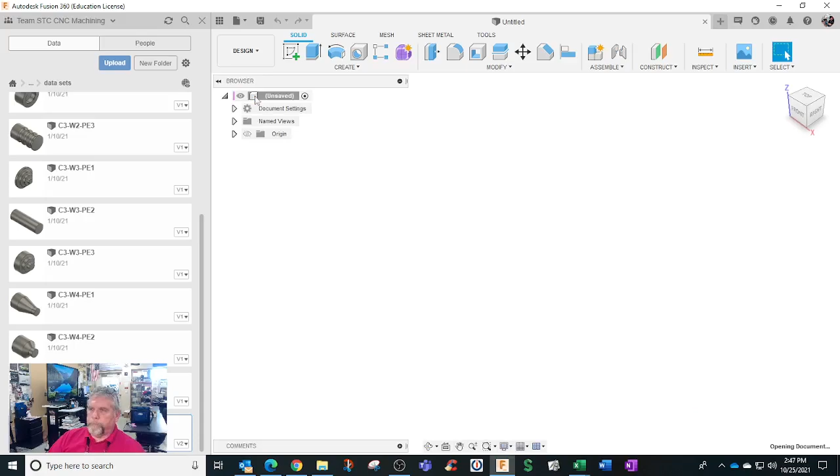Alright, probably the first thing we want to do is at least have the basic Titans of CNC library. Under Student Assets Uploads, we go to CAM Tools and get the rocket lathe tools. Alright, and you go into the assets and copy. When you open the file up, just copy and save it in your directory. So this is out of the lathe course. And warnings, okay.

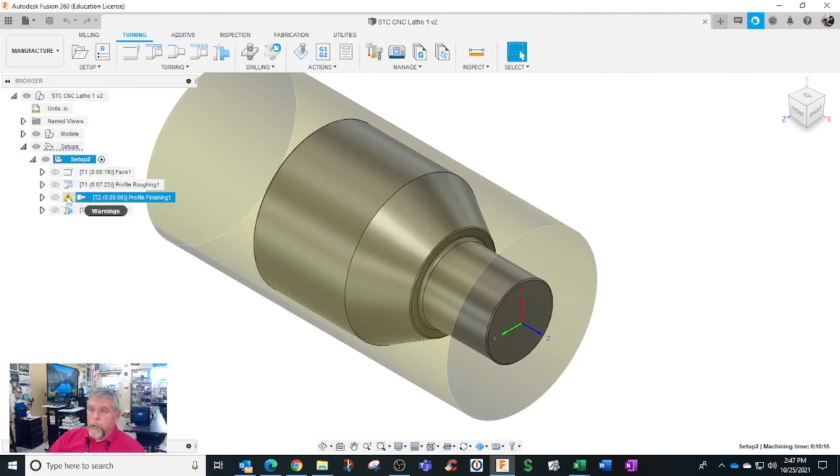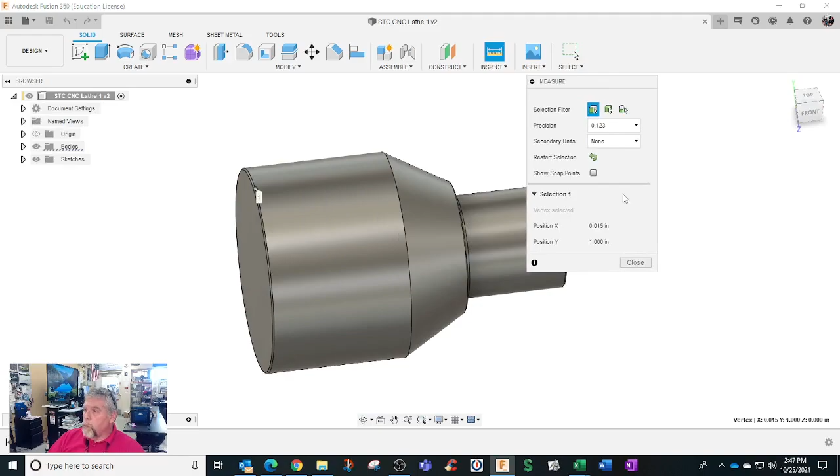I guess I'll just go over this now. It looks like I started to program it. So we're not designing. This is the design side. Pretty simple part. I'll do a quick inspect on size, like the big diameter. Says 1. Oh, I can't really tell what that says. Inspect that ring. I for inspect. 2-inch diameter. Okay, gives me a good idea.

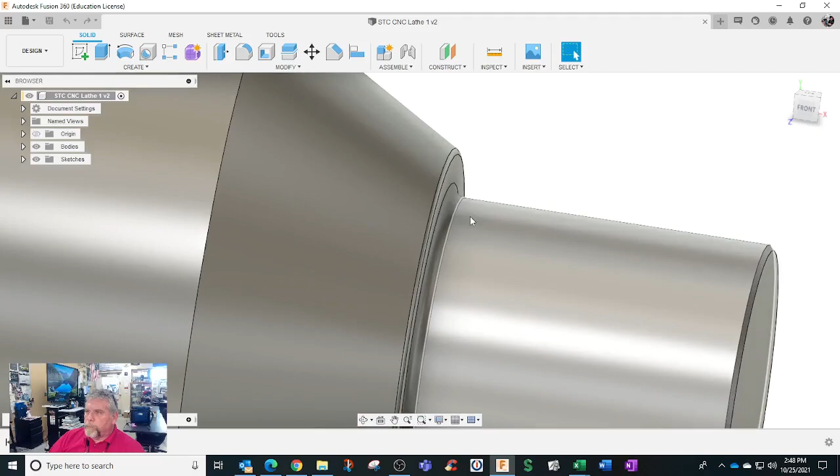So in our CNC lathe, we would have to call this a chucking part. We can't run bar stock. We'd have to cut off material, and we've got to cut off extra to hold in the chuck. So as far as your setup goes, if we look at this, it's a pretty simple part. I can even turn the sketches off.

It's got a little chamfer, radius, I can't tell. Inside here is always going to be radius. That's how hopefully lathe guys design it, unless they're putting threads there. It's a pretty simple part. So I would treat this as rough, finish, cut off. 3 tools only needed for this.

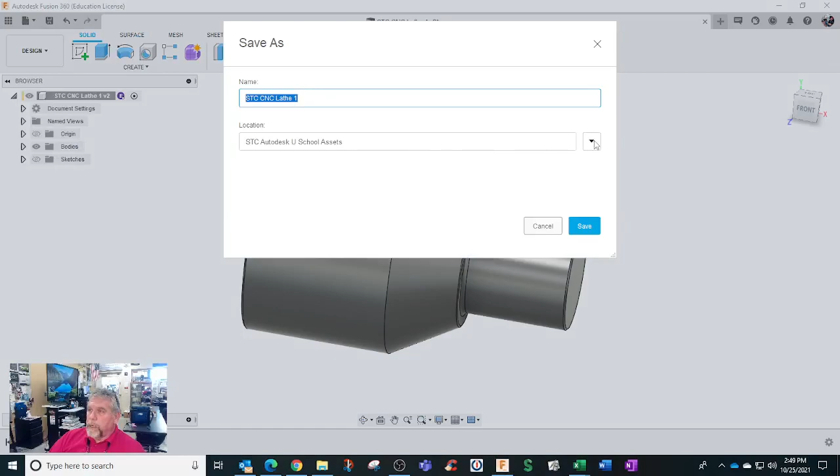So I'm going to just save this as a copy. Save as, I can't save it in the assets. I'm going to save it in Pokey's directory. Oh no, I'm still in the assets. Tech, Pokey, new folder, lathe. Must have my caps lock on. Alright. Save. Okay.

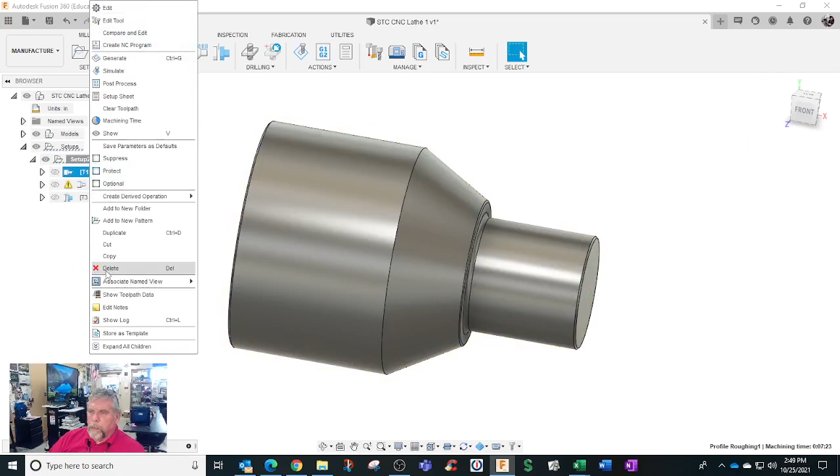Let's see, manufacture. Right. I'm going to delete all these things. Delete. Delete. Delete. We have no setup, right? So up here we've got milling, turning, additive, inspection, fabrication. That'd be sheet metal.

So we're in turning. But if you happen to be here by accident, you hit new setup, and you end up with that, it's probably still in milling. So you can switch that on the fly. Turning or mill turn. Round part. So it always gives you a suggested size. And we have 2 setups there. Let me cancel. I'm going to delete.

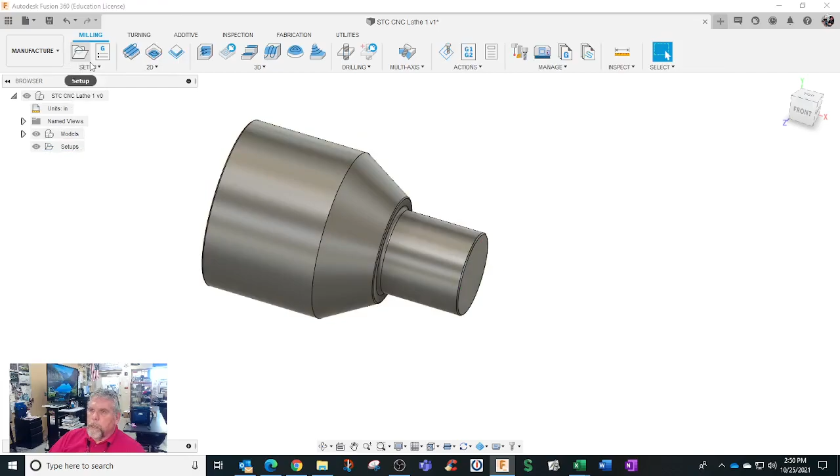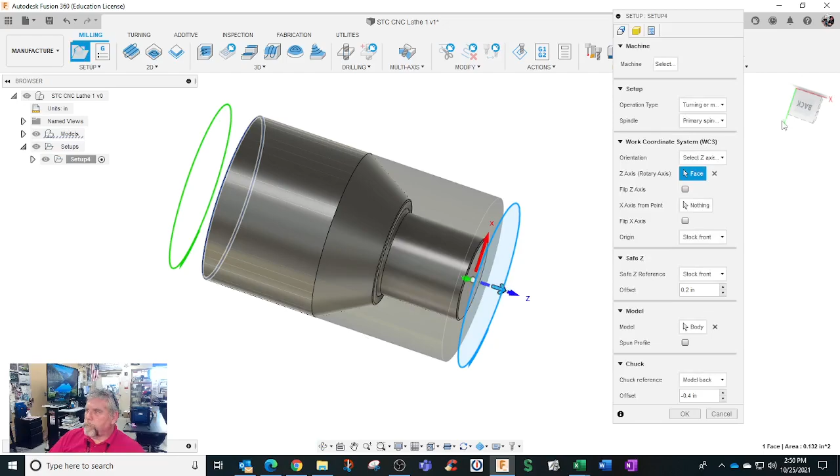Alright, setup, new setup, turning, right? Z, or the orientation, this would be Z facing the front of the machine, and X would be actually facing up. So that's probably going to be our orientation, like that. Even though it doesn't quite line up with that. If I really want to, yeah, that would be good right there. X up, Z front. And I want it to align to the view cube.

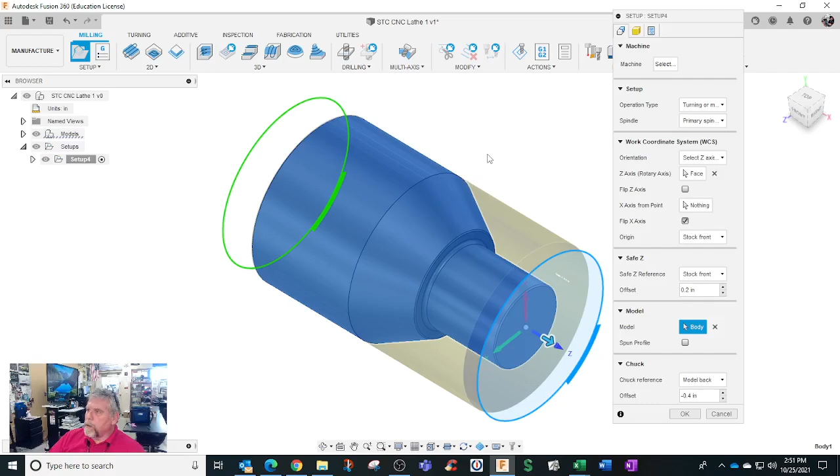So it's identified the body, right? And it gives you some suggestions here. The material size. Let's look at that. So it says fixed size cylinder. I'm going to go to the next increment up, like 2.25. All right. I like that material on the front. So I'm going to do offset from front and put an offset of like 0.025. Extra on the front, and I need some on the back.

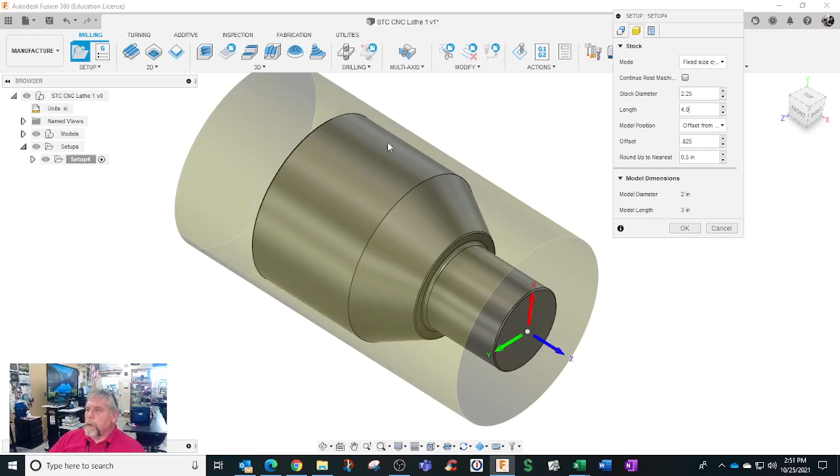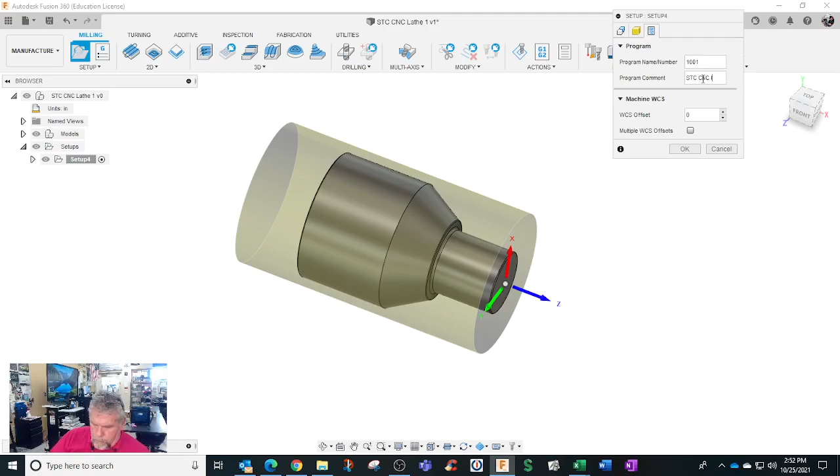Let's see. Make it 4. And I'll have to estimate how much I'm going to clamp by. I'll just leave it at that for now. And I'll get the setup tab done. So I'll call this STC CNC. Oops. Oh, the caps lock was on. Right. Okay. Alright, so we got a basic setup done.

So we're working out of the tool library, the cloud library, STC Rocket Lathe tools, right? So in here, these are turning tools. It says turning general, right? Boring bar, turning grooving, and threading. So pretty basic. I'll shut all those off.

All right, so up here we have facing, roughing, finishing, and grooving, and then parting. And then we have drill cycles. And so on the lathe, it's going to be drill on center. Pretty basic. Also, some of the tutorials, the roughing and finishing were on the same tab. So you're going to have to read between the lines if it's like that.

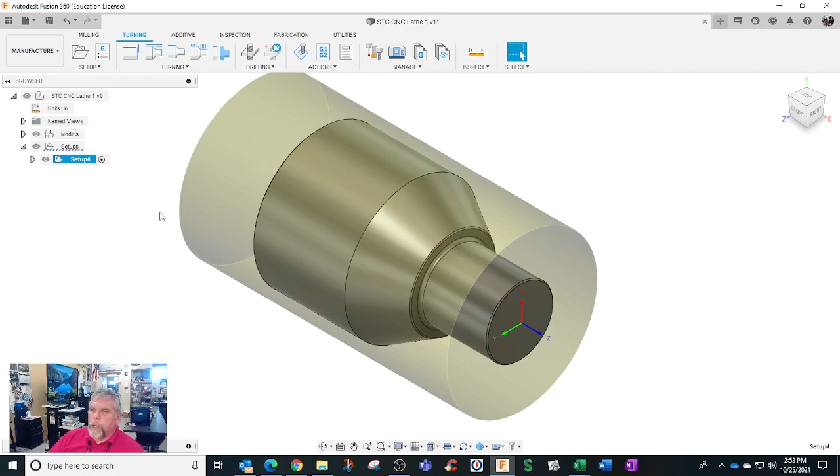I always want to do facing first. So I'm going to go facing, and I got to go get a tool. I'll go to the Rocket library and see what I got there. And I'm going to do turning general, and I'll go with the bigger one, tool 2. I'll go aluminum rough for feed and speed. So these machines run in feet per minute. So I'll just go through. These are presets. I got flood coolant.

Use constant surface speed. That's going to run the G96 code. Even says right there in the highlight. And it's also known as CSS, constant surface speed. And it's going to run in surface feet per minute. So your feet per minute, that's all you need to run these things. And you want to put in maximum spindle speed. This is also known as a G50 command.

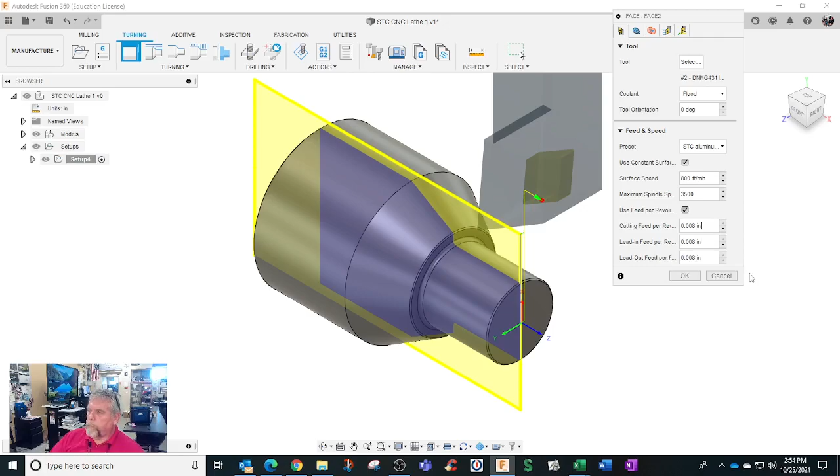So this is going to be a lathe chuck job. I'm going to make that 3500 max. And we're going to use feed per revolution. So you want to have both of these checked. And here's some suggestions. 0.008 cutting feed per revolution. So the lathe runs per revolution, which is like the chip load calculation. And you only have one tooth, so it's all you really need. Making these all the same would be fine.

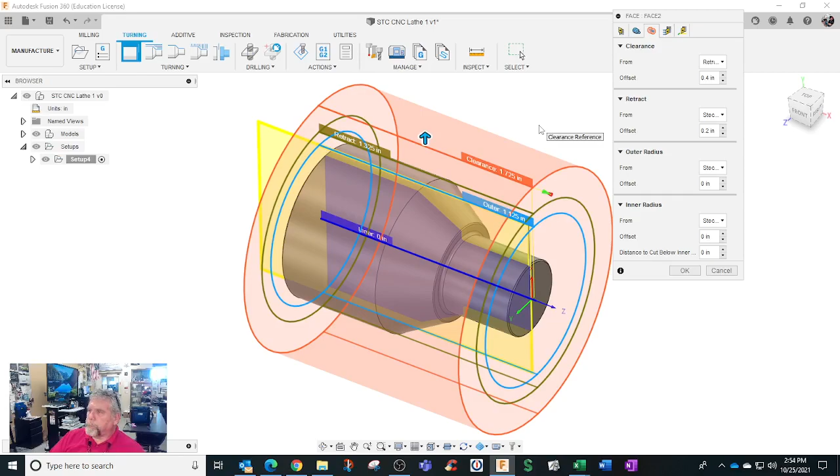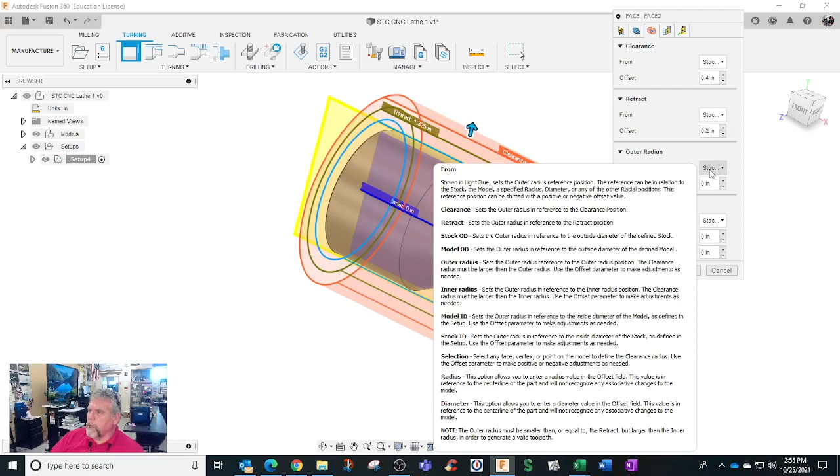Geometry. This is kind of like how do you identify the part, where's the model, and are we offsetting? I would leave it just like that. Radii is equivalent to the heights command on a mill. So your lathe tool comes on the outside, and they got various rings if you want to think of it by height. The safest one is always used from stock outer diameter. So retract, and all these numbers will be referenced to stock, as long as you have the stock spelled out correctly. The inner radius is going to be where is the inside. I would leave all those alone.

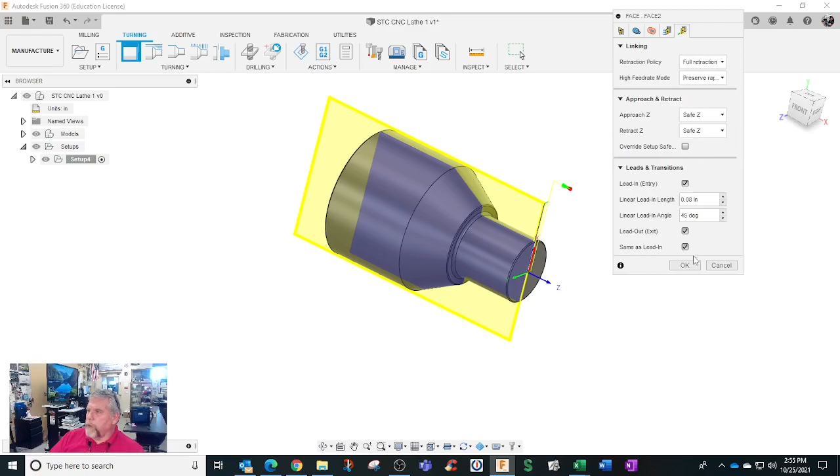And then you got your turning tool. So you got multiple passes. Let's look at stock to leave. I want to leave 4 thousandths on the front because I want to treat this as roughing only. And linking. And all this I would just leave as is. Pretty simple, it just makes a face cut.

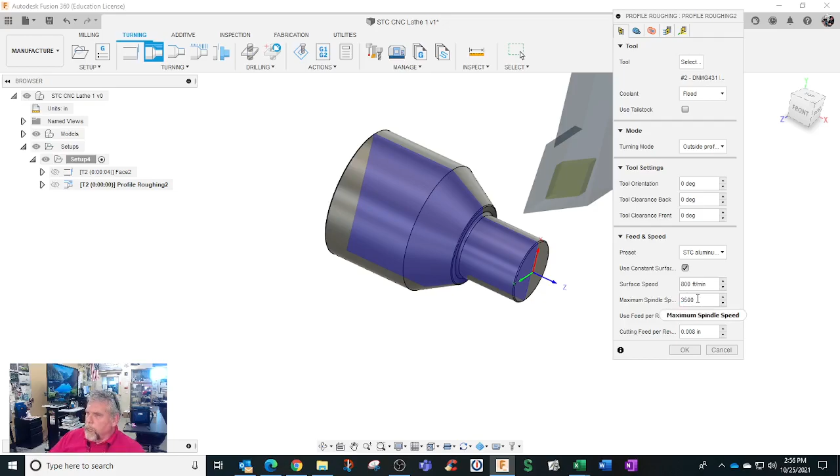Alright, so I'm going to go right to profile turning, right? This is going to be roughing, and I'm going to use the same tool. Flood coolant, outside profiling, orientation, feed and speeds are all set. You go with 3500, and if you get tired of doing that, you can do save as user default. Alright, same orientation we have. We're actually going to go along the part here. It identifies the profile. That's why that blue thing is in there. So model front is the beginning.

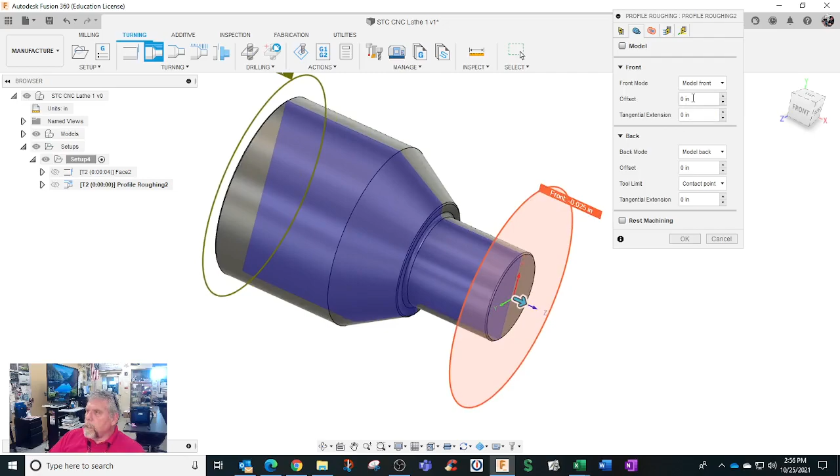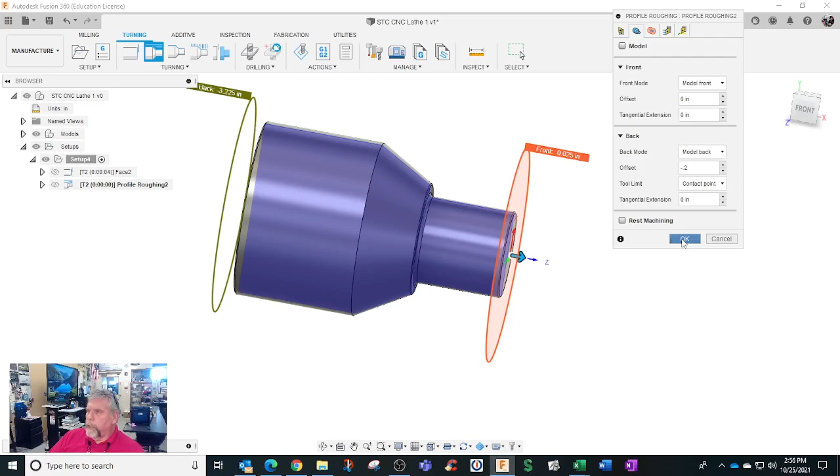What the heck is that? And model back. Typically I like to go further back than the model because of the lathe, because of the parting tool. So I might offset that. Let's see, wrong direction. I forget sometimes. I'll go 0.2. Hit OK. Let it calculate, and that doesn't work too bad.

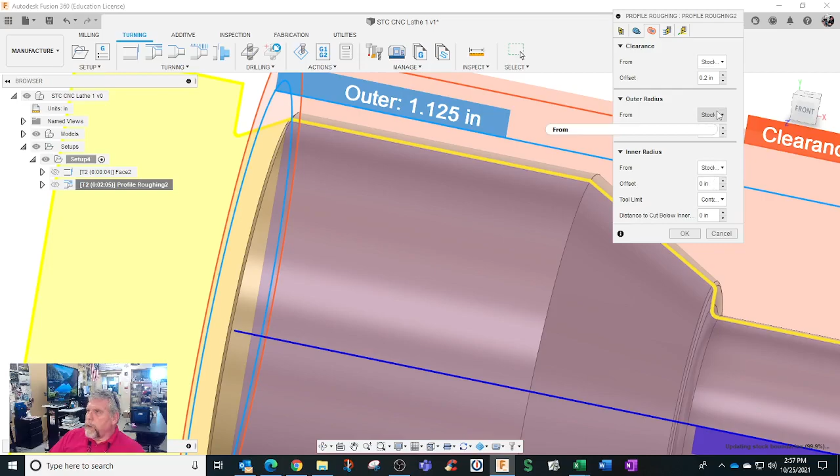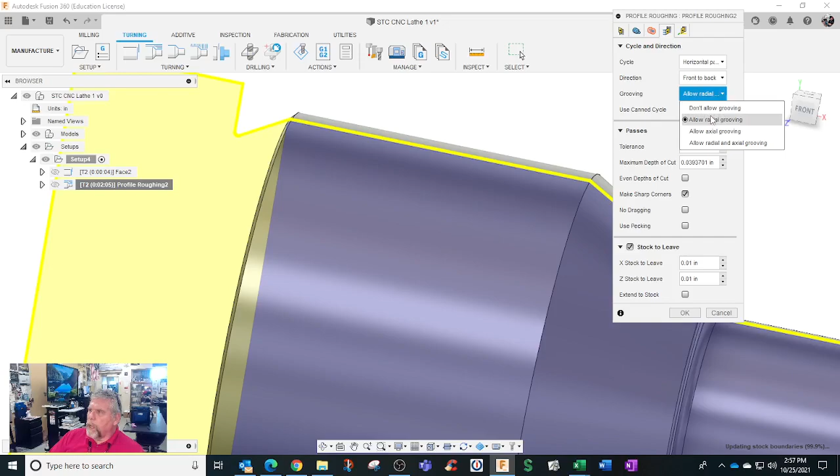Geometry, model back contact point. That's how far back we're going. Tool limit. So I can learn how to play with that one. We've got stock to leave, 10 and 10, right? Sharp corners, tolerance, maximum. So this is taking 40 thou cuts. This will be fine. And these are some other settings. Allow radial grooving. Let's try don't allow grooving. Okay. There's the solution right there. I would prefer that way. Look at that, I'm learning stuff all the time.

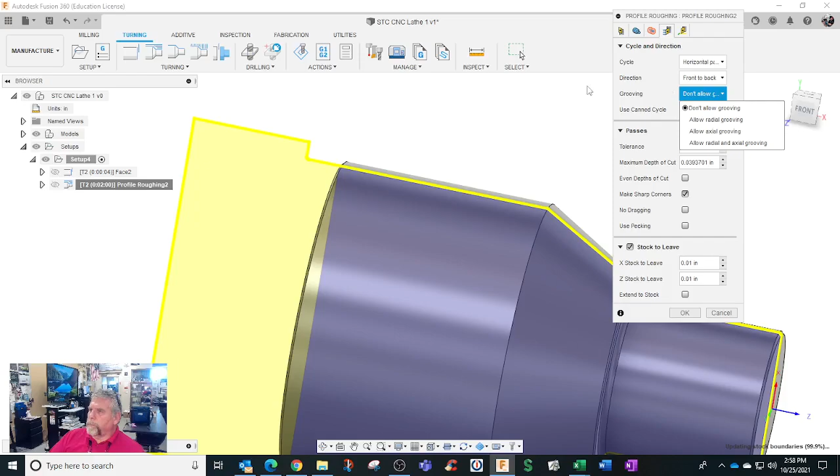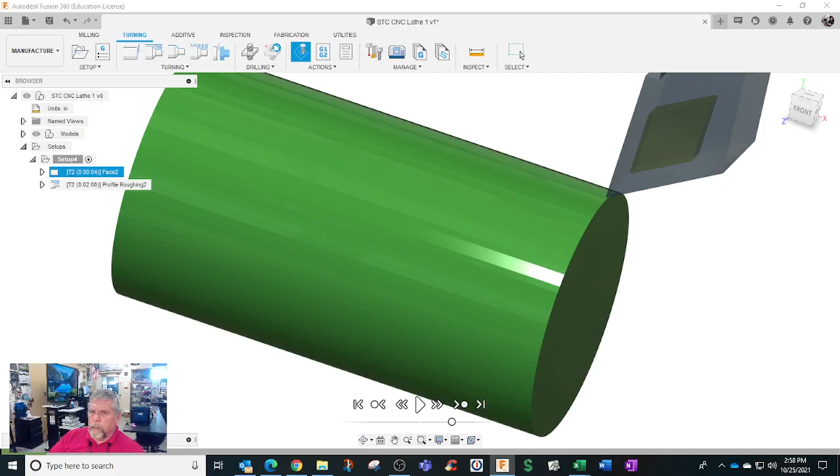So your settings up here are horizontal, yes. Front to back, yes. And don't allow grooving. And not using canned cycles. Hit OK. So that'll pretty much take care of the roughing to get it close. I will simulate real quick. Move this out of the way. And press play, right?

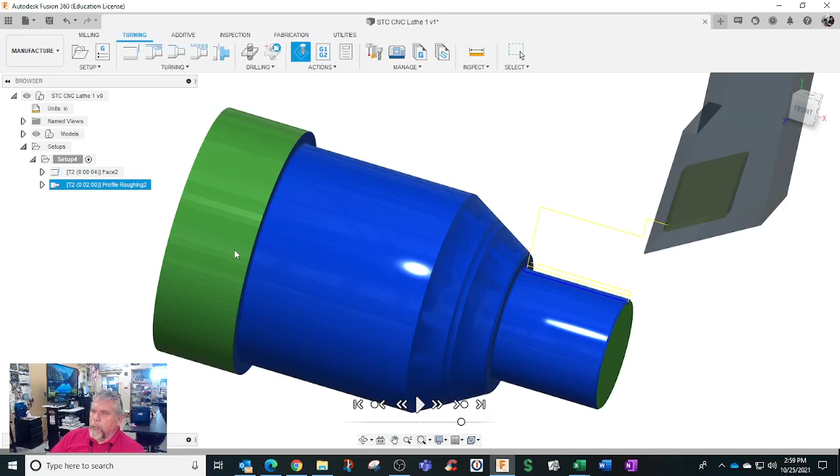There it is. So I think for now I want you just to start playing with the models, and we're going to see which parts we can make. But if you go take all these parts, this will be the beginning, so this will be the roughing part, and I'm going to add the finishing next.